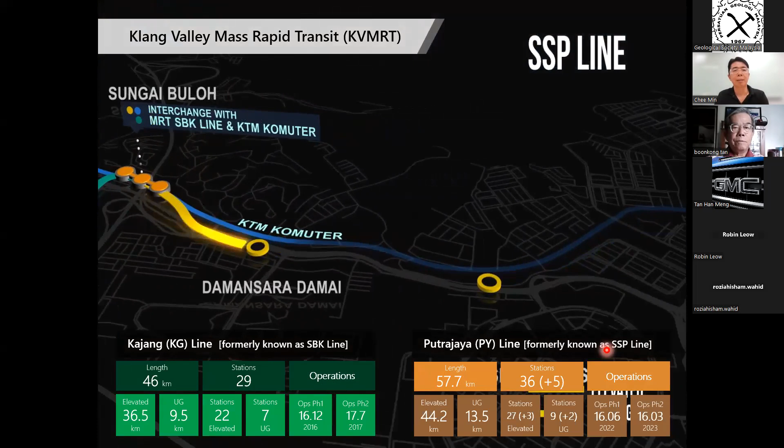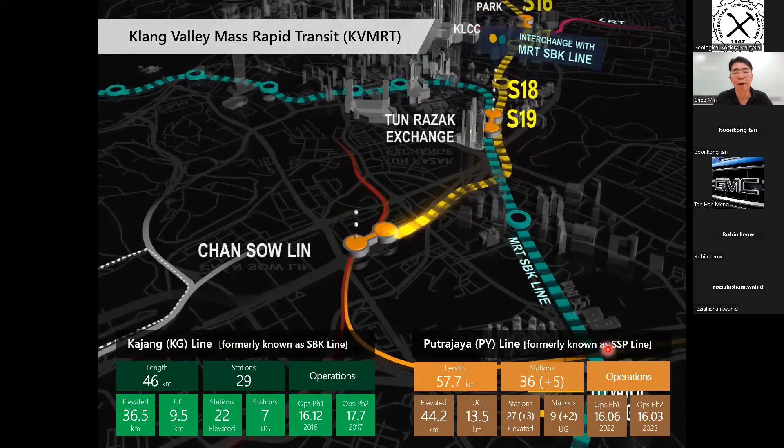I will discuss this topic based on two case histories in this Klang Valley Mass Rapid Transit project, one of the mega infrastructure projects in Malaysia completed recently. The Line 1 Kajang Line, formerly known as the Sungai Buloh Kajang Line, has a total length of 46 km, 29 stations, and started full line operations in July 2017, which was 6 years ago.

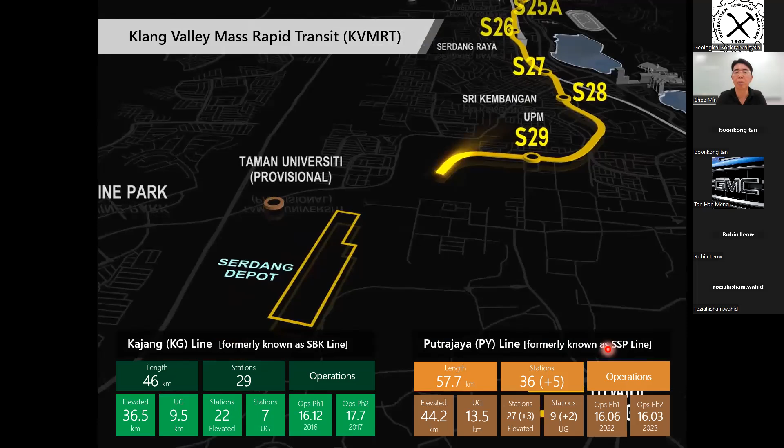And then the Line 2 Putrajaya Line, formerly known as the Sungai Buloh Serdang Putrajaya Line, with a total length of 57.7 kilometers, 36 stations inclusive of 5 provisional stations, of which 9 are underground stations. It opened in 2 phases - Phase 1 was on 16 June last year, and full line opening was just in March, about 7 to 8 months ago. I hope you enjoy this metro line.

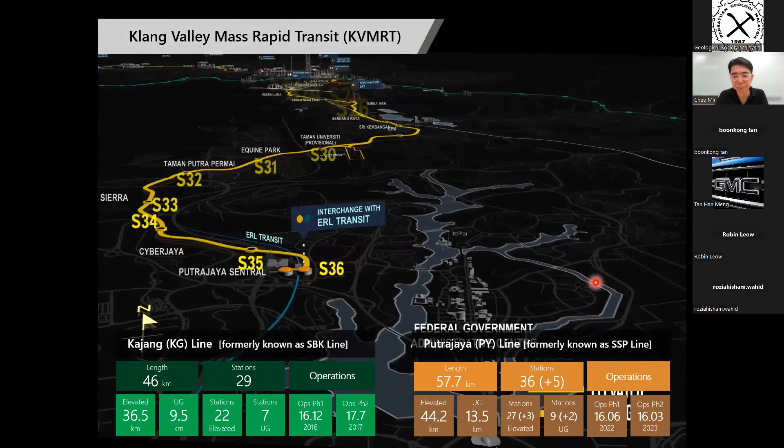Geologically, we can see that Line 1's alignment basically runs through 2 distinct geological units, which are Kenny Hill formations and KL limestone. The interface between these 2 formations is encountered after the Bukit Bintang station, somewhere near Pavilion KL.

And for Line 2, the Putrajaya Line, basically the line runs through all 4 major geological units in Kuala Lumpur, including the Hawthornden Schist. There is a stretch of elevated viaduct where the foundations encounter the Hawthornden Schist.

For the underground alignment, it starts at the depot with the KL limestone. Then the first underground station, Sentul Barat Station, is actually at the interface between granitic formations and limestone. Then the tunnel runs into granitic formations, and arriving at Titiwangsa is again at the interface between Kenny Hill and granitic formations. Then Hospital Kuala Lumpur is actually in the Kenny Hill formations.

We did encounter the quartz materials during tunnelings around these areas. Then we move into the KL limestone, arriving at the Kampong Baru, or currently known as the Raja Uda station, which is located at the alluvium overlying Kuala Lumpur limestone.

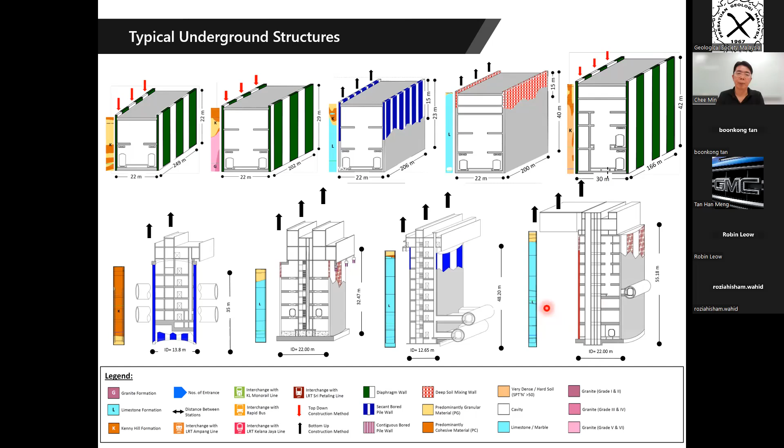In terms of excavation depth, the underground structures mainly are, I would say, 20 meters deep or deeper than that. For Kajang line, the deepest station is actually the TRX station located in limestone formations, 44.5 meters deep. So for others, 4 stations located in Kenny Hill formations where we adopt a diaphragm wall, the diaphragm wall thickness is up to 1.2 meters and quite reasonable tips up to 50 meters.

So when we built line 2, started in 2016, the stations actually go much deeper than line 1. One of the reasons is the complexity of the underground spatial developments in Kuala Lumpur. For example, some of the tunnels have to undercross existing underground infrastructure like smart tunnels. Even the line 2 tunnel has to undercross the existing line 1 tunnel, for instance near TRX, where these 2 lines actually interchange. Because of that, you can see the stations have to go deeper.

And for line 2, the deepest excavation is IVS 2, 57.5 meters deep. I believe this is the deepest excavation that we as engineers have faced so far in the KL region. So we can see that even the diaphragm walls go deeper and deeper.

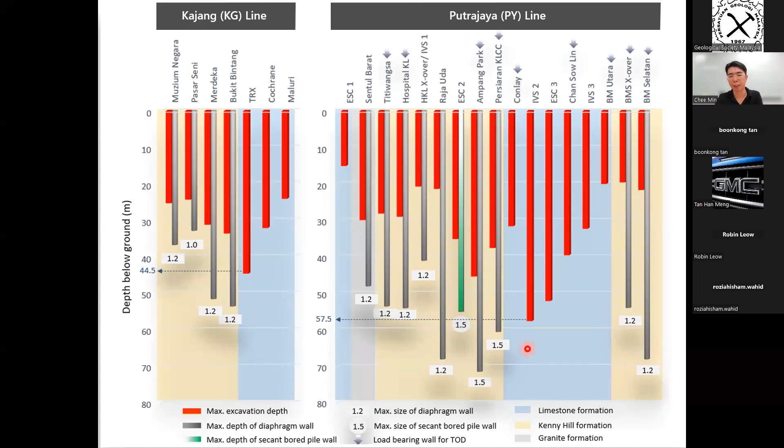And the size is even up to 1.5 meters thick for Ampang Park station. And even KLCC station is also 1.5 meters thick. So all these are the new challenges that the engineers and geologists have to face in these projects.

And now, these are the underground stations superimposed onto Kuala Lumpur maps. You can see they are mainly located in the congested urban built-up setting areas. Some other stations are actually located adjacent to tall tower, high-rise buildings, all these.

Some are even located near important building structures like the national museum. Merdeka station is actually located just right beside the national stadium, and of course, the currently tallest 118 Super Tall Tower. Same thing for Tun Razak, also located right next to the Super Tall Tower, 106 stories in height.

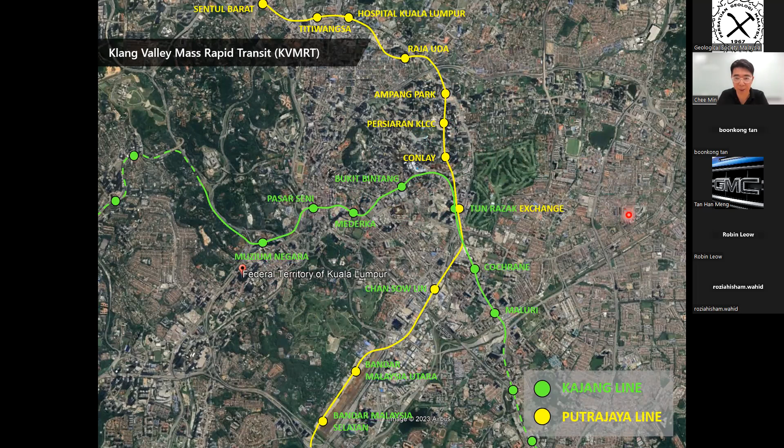Another case in point, even in Line 2, this is the Bandar Malaysia North station. As you are aware, it's located in the Sungai Besi airfield. I would say it's reasonably okay, but of course there are another set of challenges - Bandar Malaysia South is actually located right next to the heritage control tower. So it's also quite a difficult construction site.

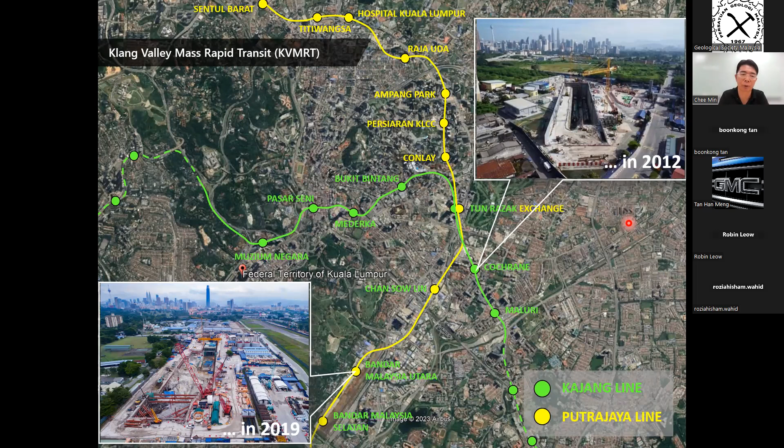So of course, when going into the KLCC area, the stations, like in this case the Bukit Bintang station, are located just underneath the major busy Jalan Bukit Bintang. You can see the station construction is carried out in 2 phases. One is next to the McDonald's, right beside the building, just about 4 or 5 meters away.

So they have to close the traffic and divert it to one side, start to install a diaphragm wall. Then once this is completed, they move to another site beside the Selangor buildings. Then start to do excavations and proceed downward with top-down construction. Of course, now you may not be aware, because the construction has been completed, we are just enjoying the underground station beneath this busy area.

Right, next example in Line 2, like these Conlay stations - the station is actually located just squeezed between existing towers, between the buildings. The area where we do this station is about 30 meters deep, located in limestone formation, where the excavation can proceed with open cut with ground anchors. But at certain locations you can see we cannot install ground anchors anymore because there's existing buildings, existing basements, so we have to opt for temporary strutting conditions.

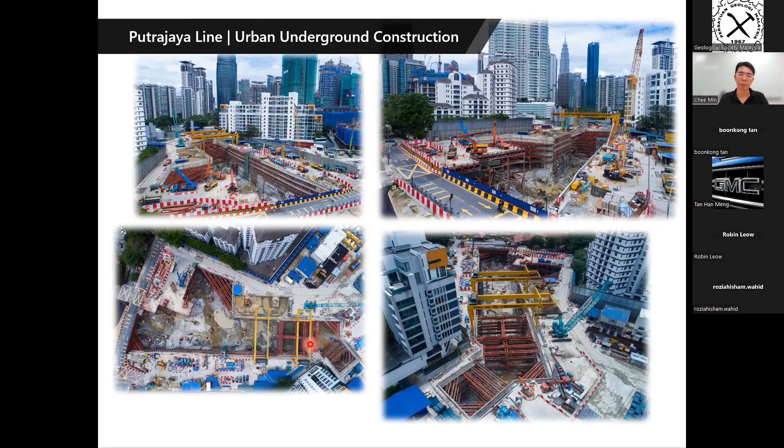So other than underground stations, we also need to build the tunnels. Just some information here - somebody asked about the tunneling. For Line 1 tunnels, 9.5 kilometer twin tunnels. Geologically, about 45% in limestone and 55% in Kenny Hill. It's quite distinct between these two.

When we come to Line 2, as I say, all the geology we have to face, not even just in underground station excavation, but in the tunneling as well - limestone 39%, Kenny Hill still majority at 44%, granite 14%. And another challenge is this mixed formation where the tunnel is actually driving through the alluviums, or maybe a mixed-face condition between soil and rocks, constituting about 3% of the total alignment.

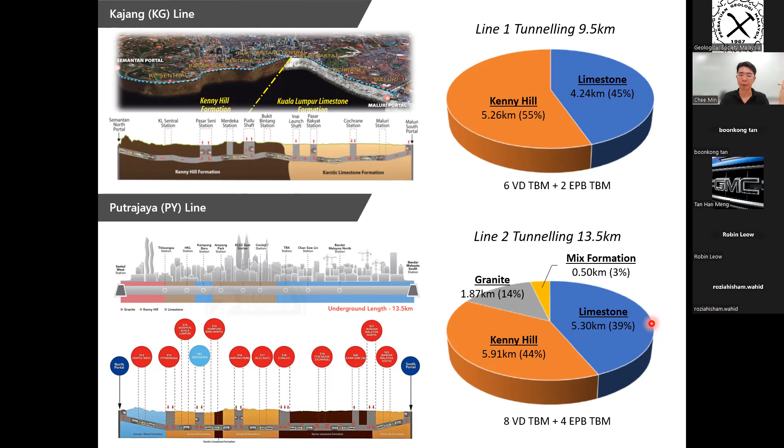These are just pictorial representations of the tunneling in the various geological conditions. You are well aware about the nature of each geological formation here.

All right, for today's presentation I will talk about 2 project sites in the Putrajaya line. Both project sites are located actually in limestone formation, KL limestone, but I would say extremes of both spectrums. The first project site is the Hospital KL crossover, 20 meter deep excavations, but the limestone formation varies - the limestone rock head actually varies from 18 meters below ground to as deep as 100 meters below ground. And we faced a lot of issues in this construction site.

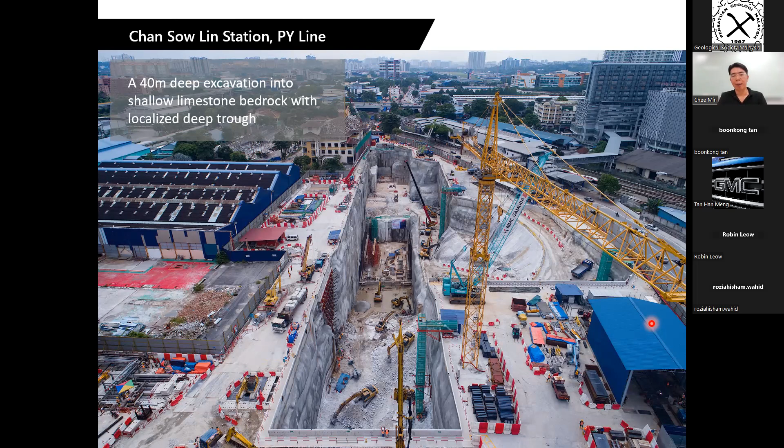So the second site is another extreme. Not only is the limestone deep, but in the KL region we sometimes face the limestone being very shallow. Just like in this case, the Chan Sow Lin station, the limestone rock head can be quite near to the surface - just about 4 or 5 meters of excavation you will encounter the limestone bedrock. But for this case, we encounter a very deep limestone trough running across the station. These stations are 40 meters or deeper. The limestone trough can be as deep as 30 plus meters.

But between these two, I will talk in more detail about the Hospital KL site and briefly walk through the second site for the shallow limestone, depending on time permitting. So I might run very fast for the second site.

So for this Hospital KL site, I will start with the unforeseen surprises - it was really a surprise to us as geotechnical engineers, and I believe for the geologists as well. Then I will talk about the geological and hydrogeological models, what are the associated geological risks, and how we actually prevented or mitigated those geological risks. Then I will follow with some performance of the construction with monitoring records, and I'll wrap it up with some lessons learned.

So let us start on the first construction site - Hospital KL crossover. I'll just name it as HKLX.

Location-wise, I believe you are familiar with the KL context. It's located next beside the IJN, Institute Jantung Negara, bounded by Jalan Raja Muda Abdul Aziz. To the south is actually Kampung Baru.

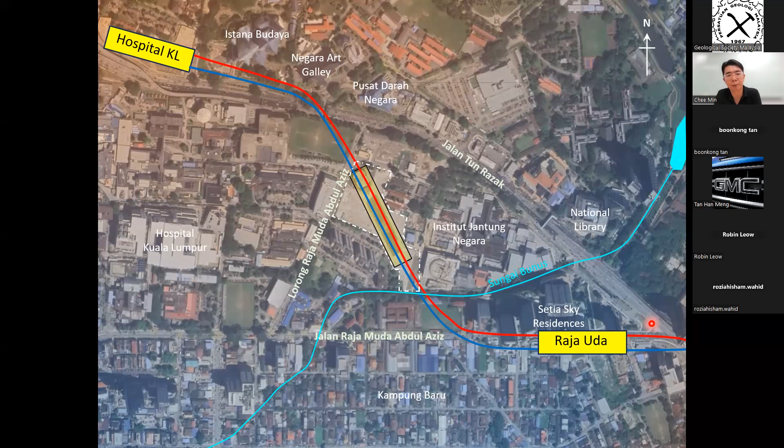Underground structure is located between the Hospital KL station and Raja Uda station. The other point to note is it's also quite near to the Sungai Bunus, which runs through at the boundary of the site. So for your information, why it's called crossover box and cripple siding track, you can look at the layout.

The two lines, the red line and the blue line, denote the two tunnels or alignments. Red is the southbound, blue is the northbound. At these underground facilities, the line or the train can cross from one line to another. You can see the red line, if needed, can cross over to the blue line, and the blue line can cross over to the red line.

To the side of it, you can see another two straight lines, which we call the cripple siding track, where for those cripple trains that have a problem, they can stable, or in layman terms, park in these cripple siding tracks while it will be pulled to the depot for further maintenance.

So these are basically the context of the HKLX. It's not a station, you can't access it here, but it's meant for the railway operations and maintenance requirements. So more important now, I would like to draw attention to the adjacent existing building structures.

First of all, for the purpose of this presentation, I will call the left side the western part or western section of the HKLX, and the right side the eastern part, instead of using true north, which would be quite confusing. Just for simplicity, I will follow western on your left, eastern on your right.

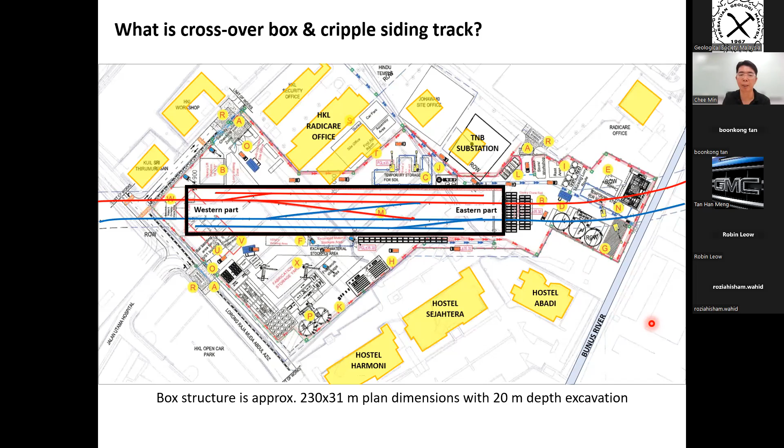So the box is about 31 meters wide, 230 meters long. The depth, as I mentioned, is 20 meters. So it's not a simple underground structure - just 20 meters deep compared to others which come up to 40 meters. This is relatively shallow, 20 meters deep, 30 meters wide.

The temporary earth retaining structure system adopted in the design are temporary struttings. There are 4 layers of temporary strutting across the diaphragm wall. The diaphragm wall is also 40 meters deep, so it's not very deep.

In this case, you can see the depth of excavation is 20 meters, then the wall embedment is another 20 meters - one time the excavation depth, 40 meters total - and the embedment is strengthened by this cross wall. Actually it's also one type of diaphragm wall, but it's built across in a transverse direction across the box structure at a 15 meter interval, so we call it a cross wall.

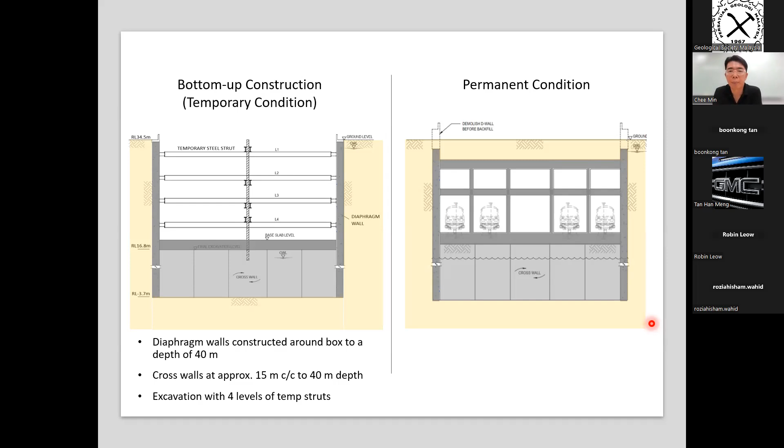Then to the right is the permanent conditions, permanent box conditions. Of course, as usual, we start with a desktop study. We look at the geology maps and see what these geological maps tell us.

Then in the version of 1993, also in the Kuala Lumpur limestone, but in this version of the map, the quartz dike is actually moving further north. And the 2011 version is quite similar to 1976, although the legend used is in a brick format, but it's also confirmed in KL limestone formations. So it's no doubt that all these versions of geological maps suggest that the site is underlain by the Kuala Lumpur limestone formations.

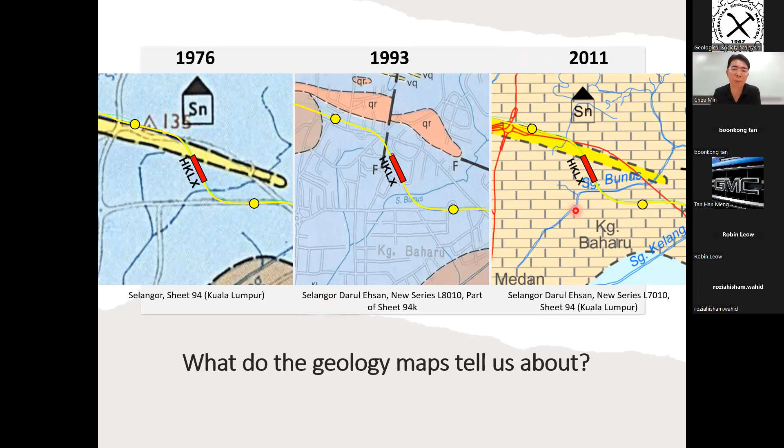So there is a reason why we traced back to all this site history information. I will deal with it in more detail later. As I mentioned, construction started in 2016, and in 2015 we were actually in the reference design stage.

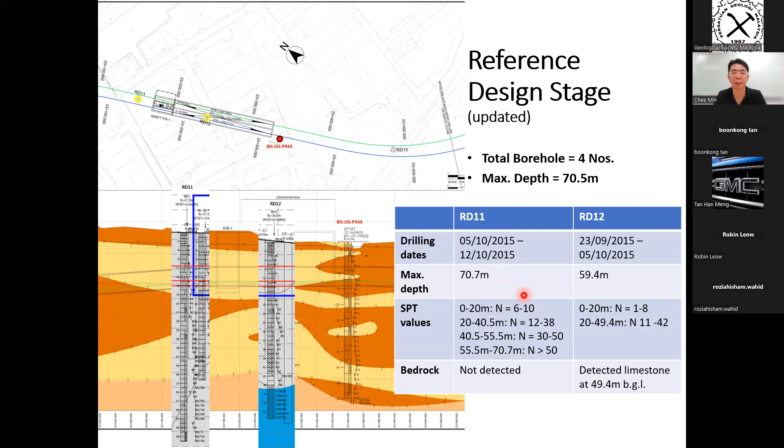You can see the profiling here: 0 to 20 meters, SPT about 6 to 10; 20 to 40 meters, increasing with depth from 12 to 38; 40 to 55 meters reaching 50; and 55 to 70 meters, another 15 meters thick, is actually hard material with an SPT value more than 50.

And then unforeseen surprises occurred. The first incident was a large ground depression. It occurred when the contractor was doing a borehole—a new borehole, other than the 4 numbers already done, carried out by the bidder during the tender stage.

This is a very deep borehole, if not mistaken, down to 100 meters deep. But when the borehole was completed, as the contractor was withdrawing or extracting the drill rods, it caused a ground depression at the car park area.

It's very strange—how can a borehole of just 4 inches in a KL limestone area cause such a ground depression? It's not a sinkhole by itself, I would say, but just a depression.

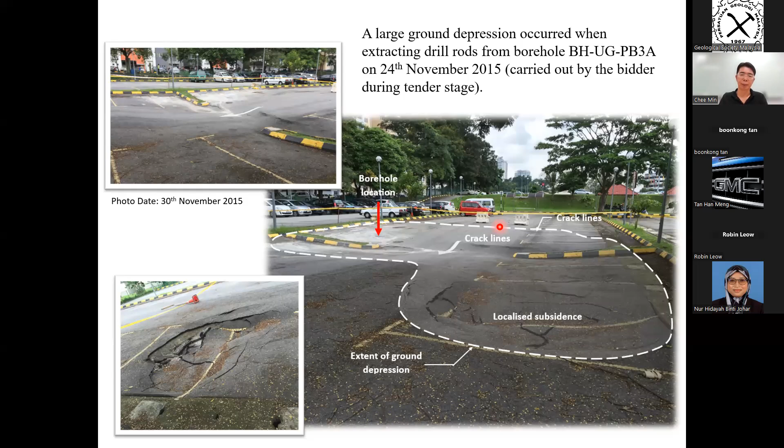Going forward, the contract was awarded in the first half of 2016. Then the successful contractor proceeded to carry out their own further investigations. The blue-colored boreholes are those completed pre-award, either by the employer side under reference design, or by the bidder during the tender stage. Post-award, the contractor carried out additional boreholes along the station perimeters, typically about 50 meters apart according to contract requirements.

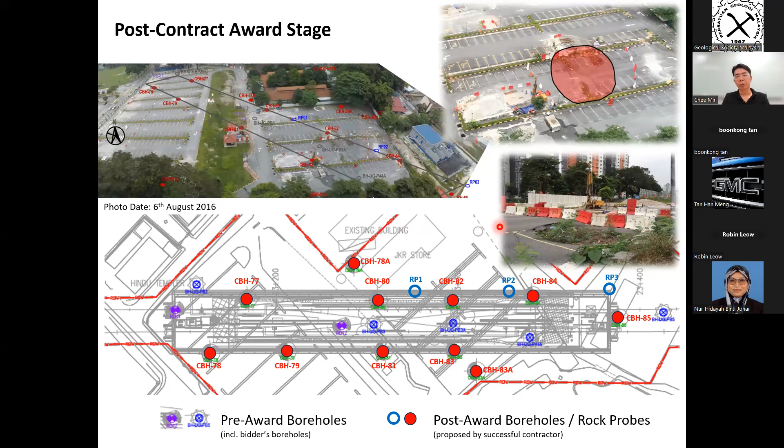Let us see what happened next. Awarded in March 2016, the contractor then carried out their boreholes and detailed design in the second half of 2016. When the contractor went to the ground to carry out grouting, it was made aware that this site is quite problematic, so in the contractor's design they required ground treatment using compaction grouting.

When they started in early 2017, a second incident occurred. You can see in the layout here that the site is actually the epicenter of the ground depressions. At that point in time, let us see what activities were on site. Please remember this red borehole is where the first incident occurred, named simply PB3A. This is the location where the first borehole drilled caused depressions around these covered regions.

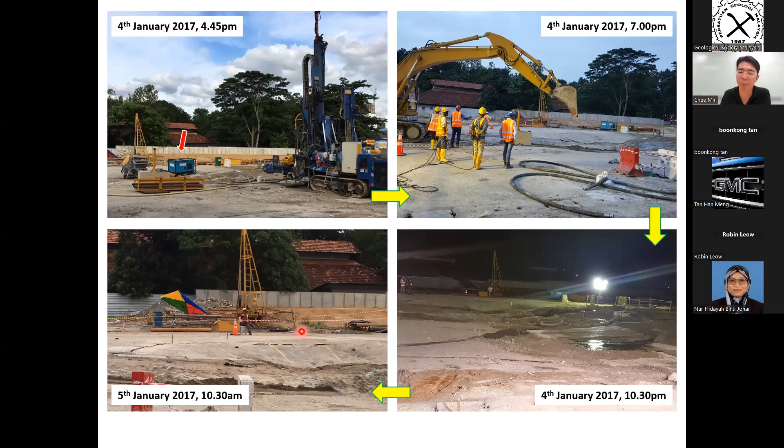Here's another photo showing the afternoon of the second day. You can see it's actually a cone shaped kind of ground depression with cracking. On the second day, the contractor installed ground settlement markers to measure the development of these ground depressions and ensure the ground has been stabilized before we move on with the next course of action.

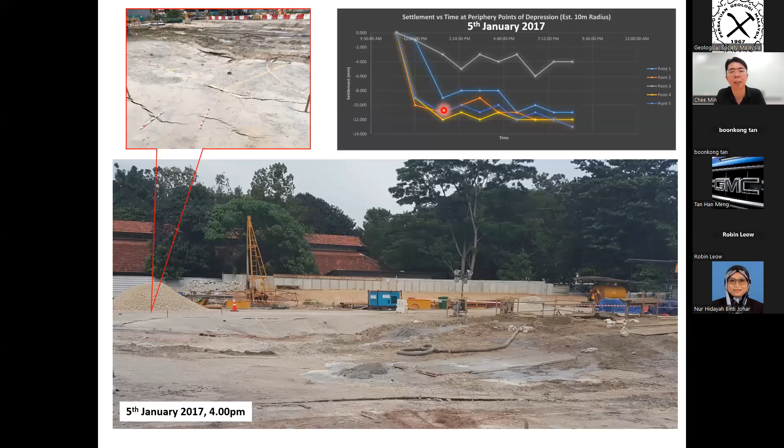These are from the 5th of January. In the morning it settled quite substantially, and we can see in the afternoon it starts to stabilize.

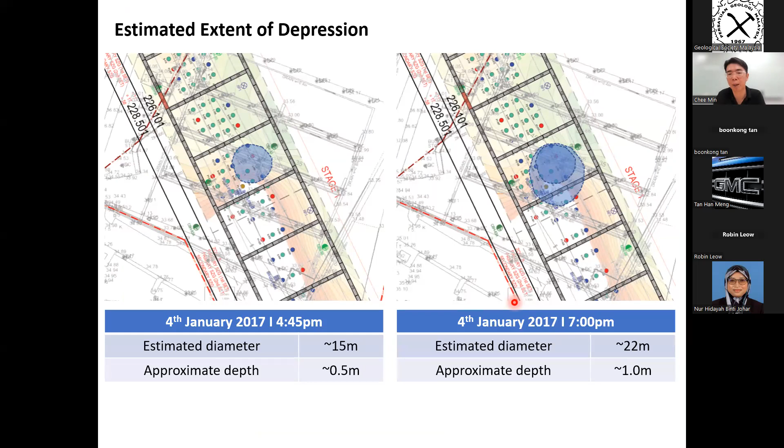So this is just a representation of the extent of the depressions. The first record estimated a diameter of 15 meters wide, depth 0.5 meters. Then it developed further to 22 meters wide, and the depth increased to about 1 meter deep.

And the ground is propagating outwards, right? At night on the incident day it extended up to 25 meter diameter wide and about 1.5 meters deep. On the second day, the ground is still propagating, but at a slower pace.

As estimated, the volume of ground loss or ground depression is about 300 meter cube. So we can see that this kind of incident is not like a usual sinkhole that very suddenly creates a hole, but rather the ground progressively depressed downwards, forming a cone shape. It's very surprising, unforeseen and unusual, I believe, for most of us.

Because of all these issues, the employer decided to commission an independent expert review, trying to understand what actually happened here. It's just a limestone formation, similar to what we've seen before, but this is an exceptional case. Because of that, there were more thorough investigations, including a desktop study tracing back to historical maps.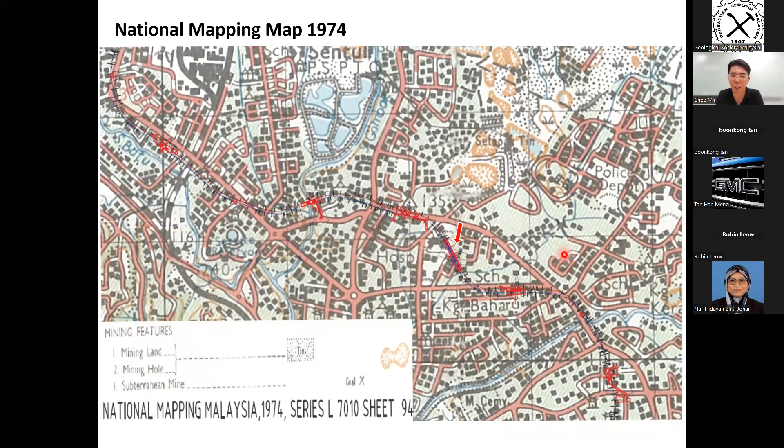This map is a 1974 so-called geotechnical map made available to us for study. The dots represent mining activities. It comes close to the site but not exactly at the site. This geological map also shows the quartz dikes to the north.

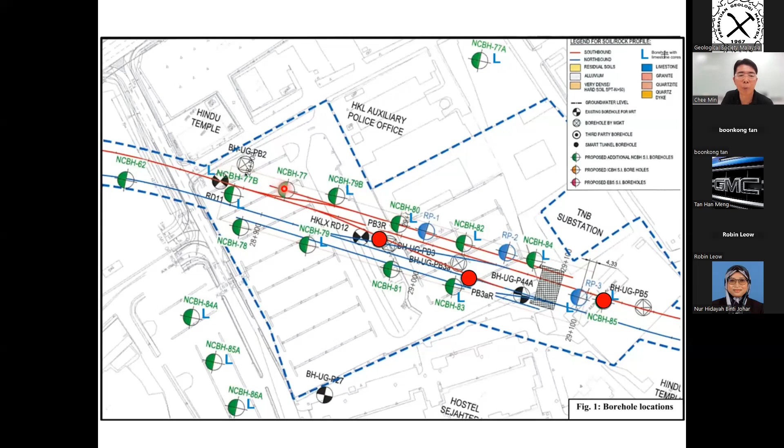The first incident occurs with this borehole, PB3AR. Then during this borehole PB3, also limestone encountered, and to the east in this case another borehole encountered limestone and NCBH 85. So boreholes labeled with L's actually encountered the limestone rockhead. Some boreholes terminated without encountering any limestone.

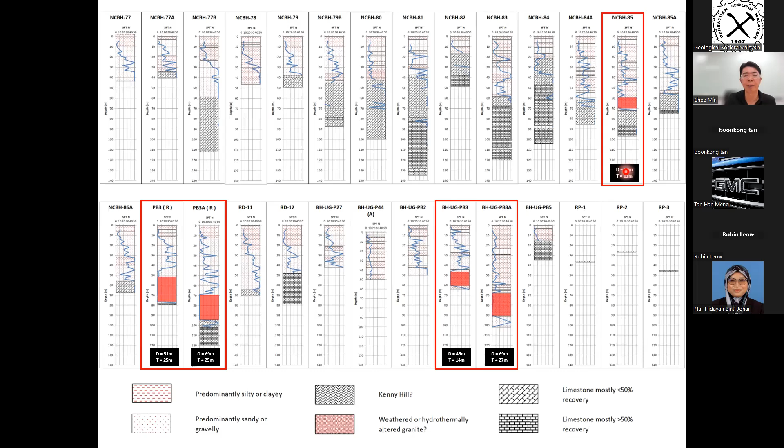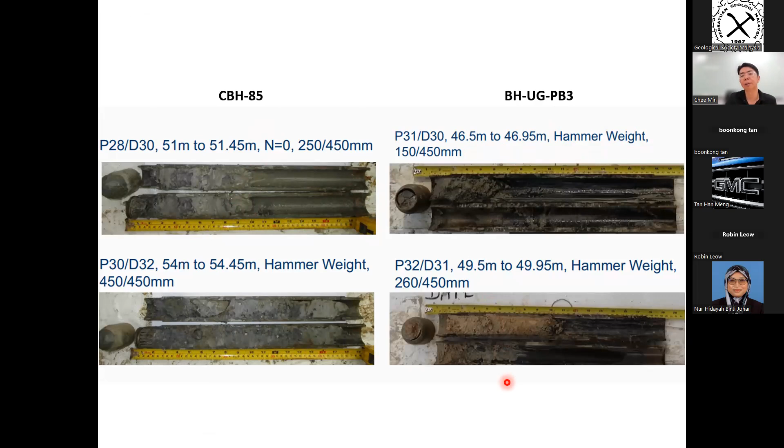This photograph shows the material sample from the slime zone. This is CBH 85 to the east side, and you can see quite sandy, gray material. This is in the middle, BH-UG-PB3, at a depth of 46.5 meters, hammer weight another sample in brownish color, also hammer weight.

When you look at the SPT value, we can see the SPT increases with depth up to about 50 meters below ground, and below that, SPT zeros are encountered down to about 80 meters. The blue data points are pre-award boreholes and red are post-award. For these slime materials, they are red, encountered in boreholes like PB3R, 3AR also. This gives you a sense that they are very thick and very deep below the ground.

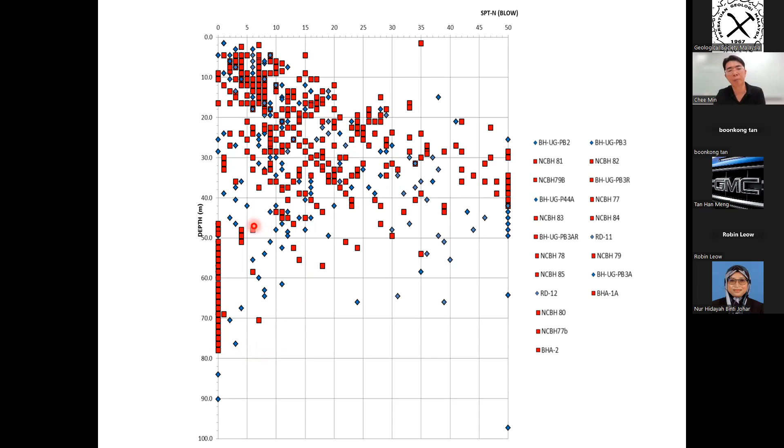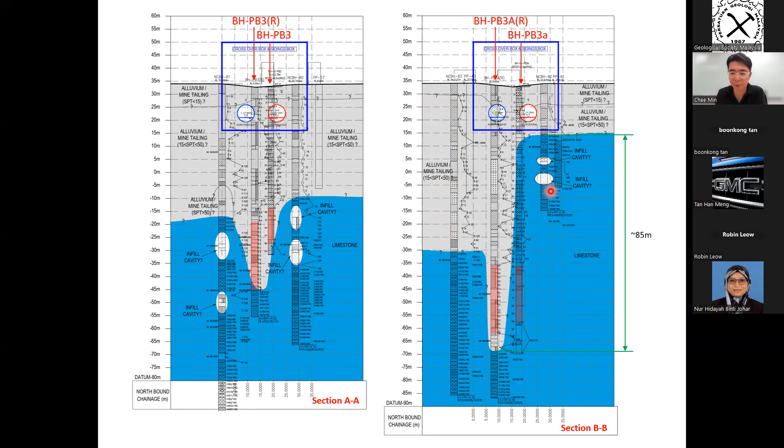We also scrutinized the borehole logs and found that the cavity infill and the groundwater is maintained overnight, suggesting the cavity is somehow disconnected. So it's actually not a solution channel or an empty cavity, where normally if you encounter that you would have water loss quickly.

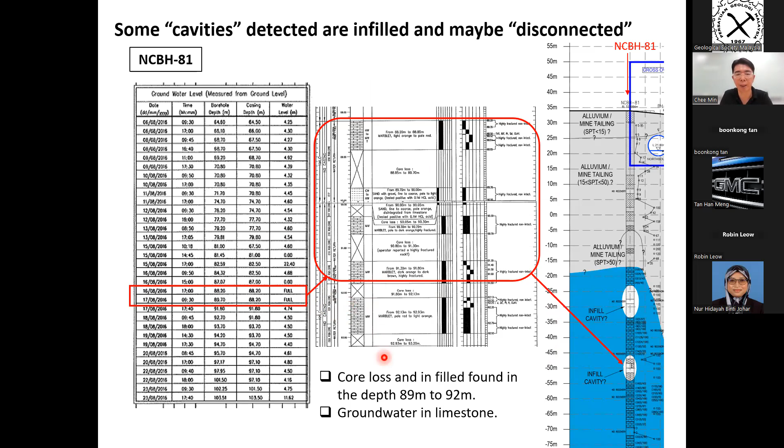For these so-called cavity areas, SPT was carried out and it revealed the N value is actually quite high, some more than 50. This is another borehole, NCBH, previously 80, now NCBH 81. Same thing - the groundwater is full overnight in field, and this is relatively deep, 89 to 92 meters, with a high SPT value. So what does this tell us?

Is our interpretation correct, or is there something else? We know the karstic features are up to interpretation, so you have to look at it three-dimensionally - not only in terms of depth where we say it's a trough, but it can extend laterally and diagonally to other areas. For this case, because of the points I highlighted - infill cavity, high SPT, and it's disconnected - we don't believe it is a floater or remnant of limestone material.

You can see it's relatively thick, about 5-6 meters for this case. We rule out this situation and believe the most likely situation is a trough, sandwiched in between by these limestone formations. Previously it could have been full limestone, but weathering and slumping into cavities created a trough. These two areas might one day become the same thing - this is an interesting part.

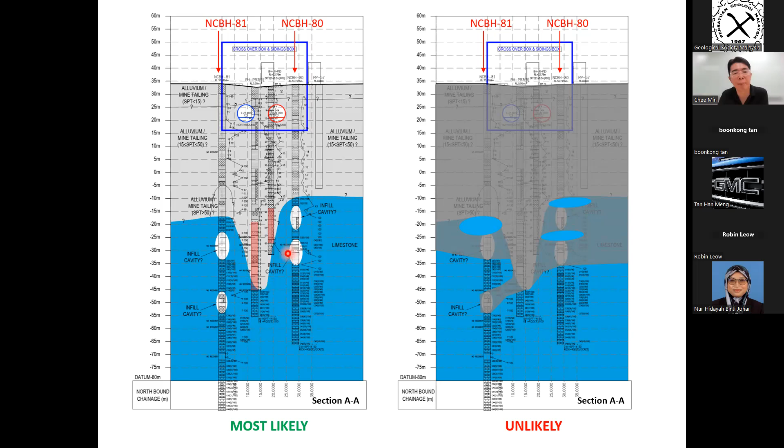We talk about the water loss in the borehole. For those two boreholes, although there was no water loss, we did encounter water loss in other boreholes, highlighted here with yellow dots, mostly located around this southbound alignment. You can see the limestone is also higher and more cavities are encountered in the southbound alignment.

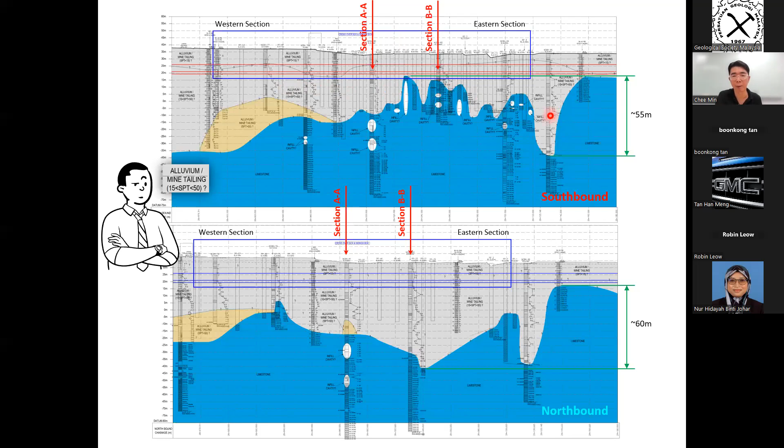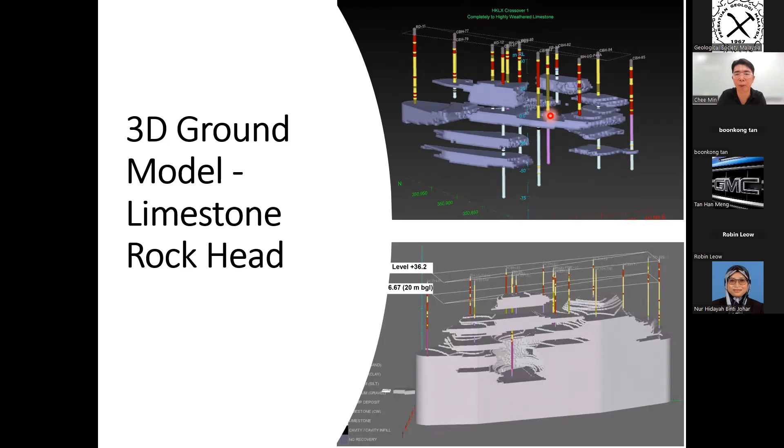Now this is another model for the limestone encounters, but I would say this is different from our interpretation because of the limitation of the models. That's why you have to be careful - you have to know what you're dealing with. This just shows the limestone in layers, but what we interpreted is actually a solid limestone with a deep trough.

Now, what is known for the ground conditions: the site is underlain at depth by limestone, and the rock varies from 18 meters to as deep as more than 100 meters. There are some cavities in the limestone, and the overburden materials consist of sand, silt, clay, gravel - all the materials you can name, we have here.

SPT values are more than 50 blow count. The slump zone is quite deep, 45 meters - which is actually lucky, since that sand is actually below the toe of the diaphragm wall. Remember I mentioned the 40-meter deep diaphragm wall - so it's also intended to try to avoid disturbing all these slime materials.

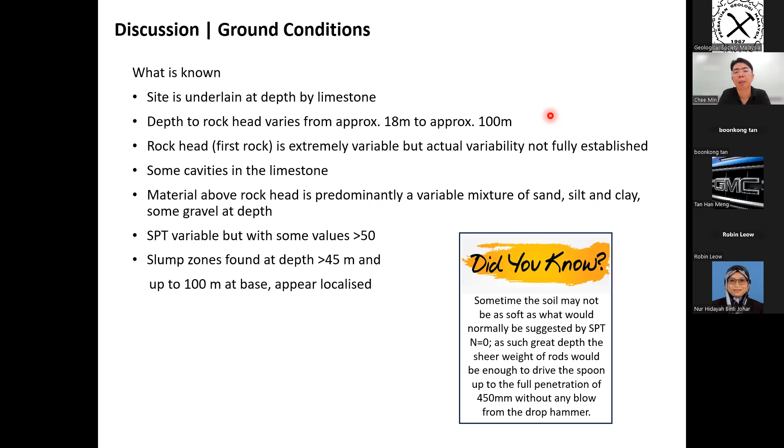As I mentioned, there were discussions on whether the overlying materials actually belong to Kenny Hill formations, alluvium deposits, or even mine tailings. This is an interesting part where we have very thorough technical discussions and debates among the experts. We have Expert A, Expert B, who are the project design consultants, and Expert C, who is the independent consultant commissioned by the employer. First of all, both consultants do not think the material is Kenny Hill formation, and this is agreed by Expert C. So they have their points listed here.

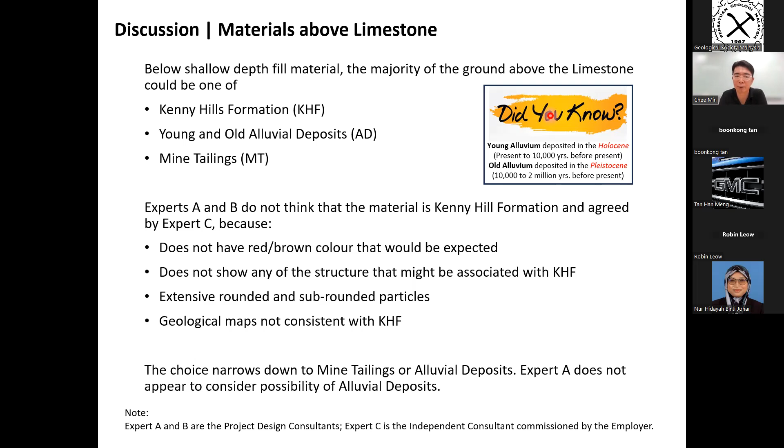But Expert A does not seem to consider the possibility of the alluvium deposit as the overlying material. Expert A thinks it is mine tailing. Let's see the points put out by Expert A in his view.

Number one, low SPT value. Expert A claimed the materials were possibly pumped or backfilled without any compaction and further disturbed by slumping into the underlying limestone, because the white color also suggests the iron oxide may have been removed during mining operations.

The third point: the materials vary widely in grain size, are poorly sorted, and display no bedding, laminations, or graded beddings. Expert A's point of view is that this suggests an artificial environment like a retention pond, similar to mining conditions.

The fourth point: borehole logs register the material as completely weathered Kenny Hill formation from quartzite. You can see the photo in the upper right, showing some muscovite content and even some iron oxide, probably weathered from the sulfides.

These are some of the case examples put out by Expert A, because woody materials were encountered in one of the boreholes.

Now let's look at Expert B's point of view. This expert tries to put it into equations for the engineer's understanding. First, let's look at the abbreviations used - I'll go a bit slowly.

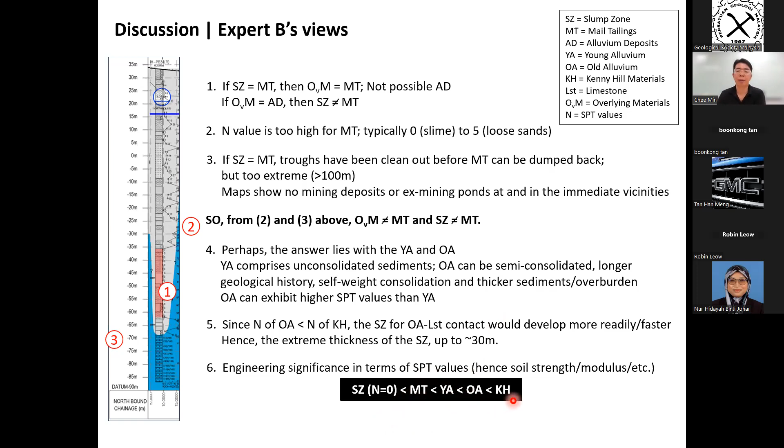So expert C is saying that most likely this is the old alluvium, based on the desk study, based on the sample inspected, based on the depth. We are talking about 100-meter deeps, and based on the variability of the rock heads and the narrow trough that we can see here.

The other interesting point he argued is that if this is a mine tailing site, in such a very narrow situation, you would need to go down 30 to 50 meters deep below the slime materials. That could mean you have to dewater for more than 50 meters deep, but this is in the center of the KL urban area. Although we are talking about 50 to 60 years ago, it's quite ridiculous in a way.

Expert C also interestingly talks about the high SPT value, which might not be expected unless there was some compaction. Not only high SPT value, but also not merely low SPT value in the overburden, the first 50 meters of overburden, so it's unusual for mine tailing. Of course, wood fragments can also be found in alluvium depositions.

So it's quite interesting. Moving forward, as engineers, technically what is more important to us is actually the performance, the engineering performance or the soil parameters of the materials. That is more key and important for us to carry on with the geotechnical design.

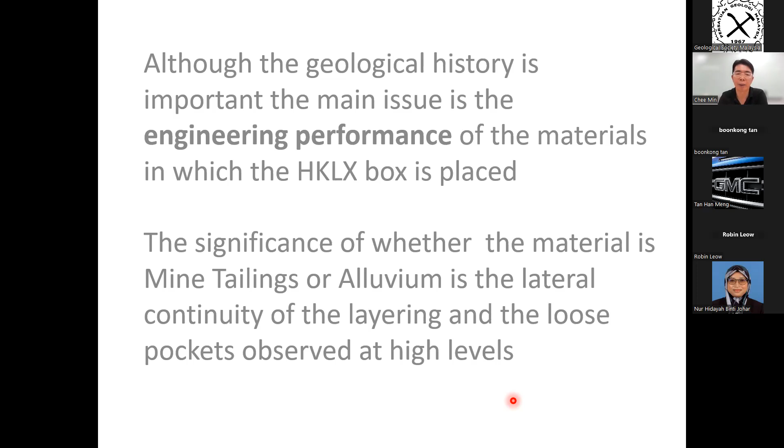So the significance of whether the material is mine tailing or alluvium is less important than the lateral continuity of the layering and the loose pockets observed at the high layer, whether it extends to a far area to the adjacent structures where it could bring construction impact - that is more important to us. So when we look at this, it's not one-dimensional or two-dimensional, but three-dimensional.

Sinkhole mitigation measures: we learn from the literature that almost all sinkholes are triggered during construction activities. Main triggering factors can be lowering groundwater tables, loss of fines washed out by groundwater into the voids, imposing additional loads, or vibration due to piling, punching of cavity either by borehole or pile. These are some of the factors.

So bearing this in mind, the prevention strategy adopted in the design is first to ensure construction load or permanent load is less than in-situ. So now you can see why, for just a 20-meter deep excavation, we adopted a 40-meter deep diaphragm wall - one-to-one excavation is not deeper than that - with the intention of trying to avoid and not increase any load to the deeper slime materials.

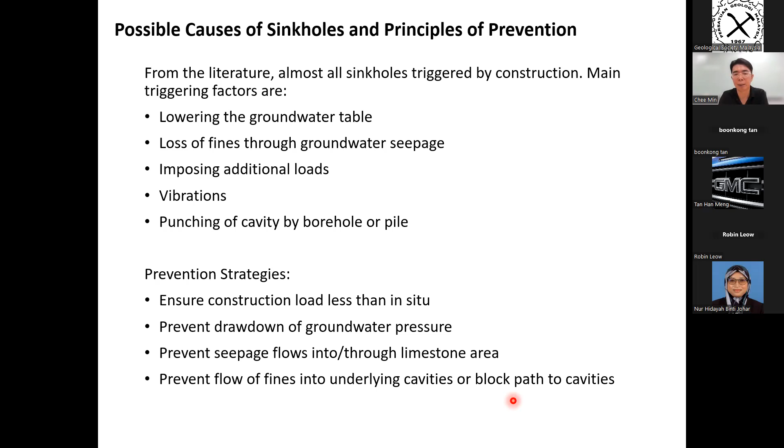Then preventing drawdown of groundwater pressure is important, preventing seepage flow into the limestone area, and of course preventing the flow of fines into the underlying cavity is also important. So this, as I mentioned just now, is the design principle for the permanent structures.

And the third point is that the base slab was designed as a deep raft foundation - it's not only relying on the diaphragm wall, but the base itself. The fourth point is the compensation foundation without increasing any effective soil stress at depth. Then the uplift is resisted by the diaphragm wall.

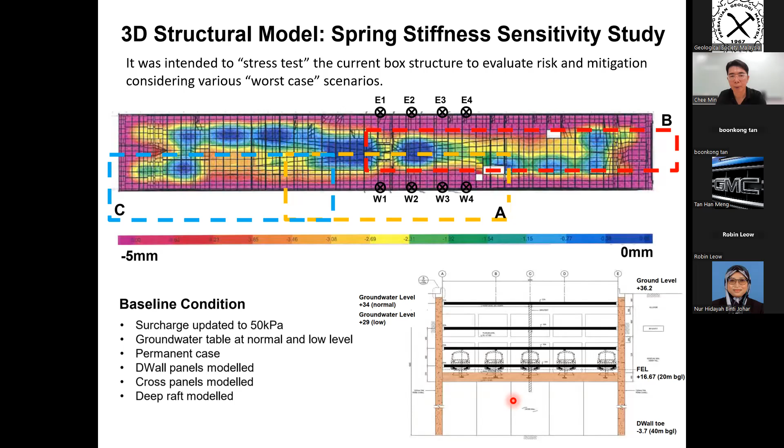So not only a normal design - because of these complexities, the engineer actually carried out additional analysis to stress test the permanent box structures, considering the slump material that we encountered at 3 locations. So there are 3 areas: zone A, B, C.

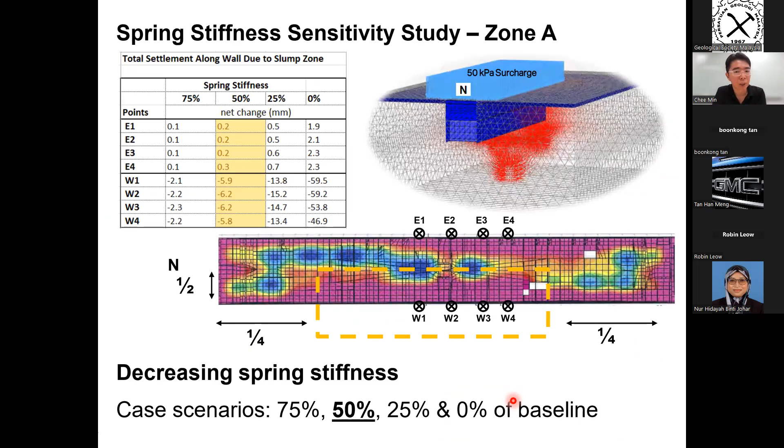Quickly run through - basically just variations in terms of the spring stiffness. We step down the spring stiffness from 100% to 75, 50, 25%, 0% from the baseline to see how tolerable this permanent structure design is. For this case, to the northbound, to the south, you can see that the limestone is much deeper, so the spring actually we have decreased to 0%.

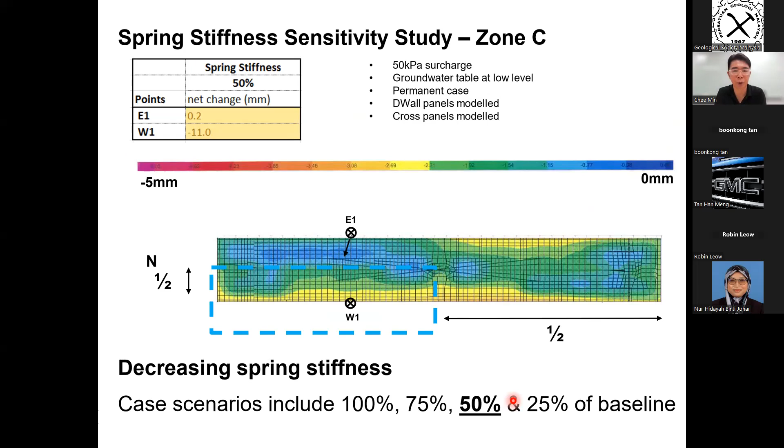Then for zone B, the limestone materials to the NCBH 85 to the eastern - again the same thing, different in the spring stiffness. Zone C is at another corner. So with all these 3 zones, it represents the entire box structure design. What we can conclude from the analysis is that the design is pretty much intact, even with the spring reduced to 50 or 75%, the settlement is still tolerable.

So then how about the residual risk? Because all this is cost, we have to balance between the cost and the risk for these areas, and we decided to adopt compaction grouting as a solution to it.

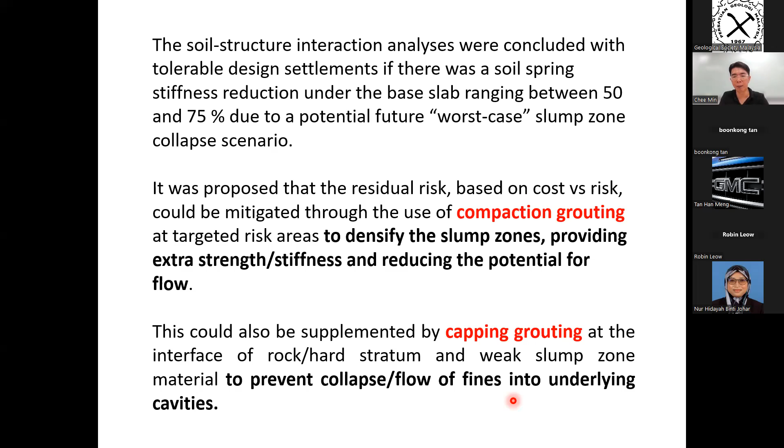There are 2 methods. One is compaction grouting - basically to identify the slump zone. It's basically grouted columns in the zone, providing extra strength, stiffness, and reducing the potential for flow. The other is capping grouting around the interface between the weak slump materials and the rockhead. So this is the figure showing compaction grouting and the cap grouting to the right. These are the typical termination criteria.

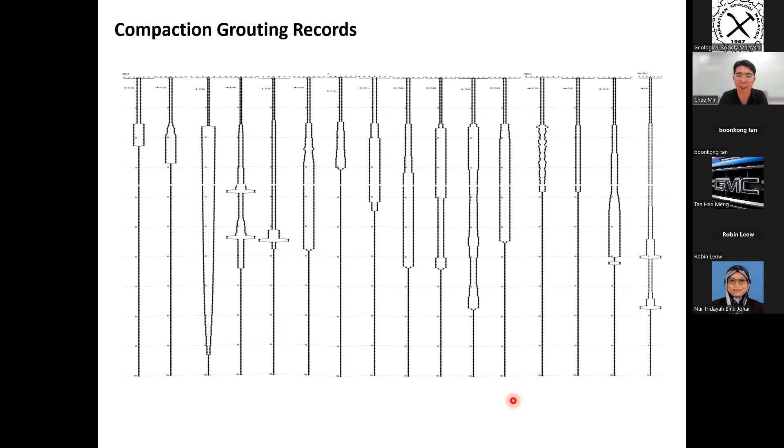So this is the typical compaction grouting record. You can see where the value increases, blowouts is where actually the weaker or softer materials was encountered. And you may ask, how about the ground depression incidence areas? It shows at these trough areas, generally higher volume intake and higher pressures is exerted through all these compaction groutings.

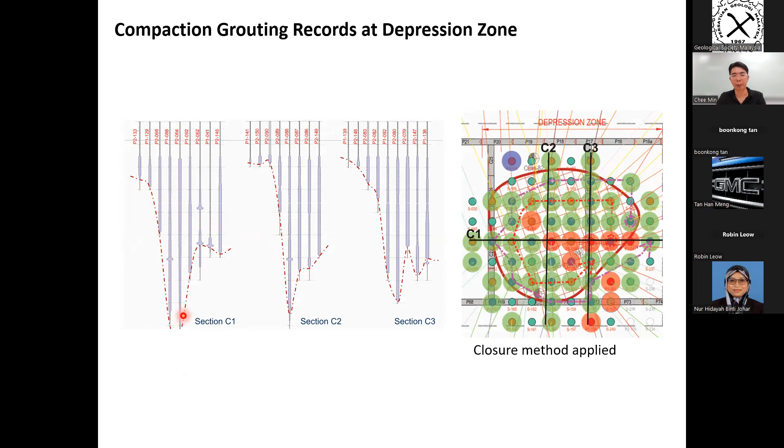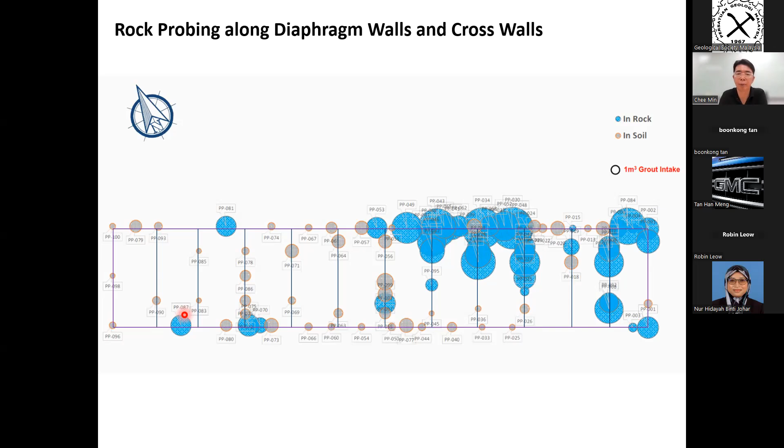And in this, all the total boreholes, drill holes, running rock probing holes for this project site. You can see the ground holes sum up to about 150 meter point with the total grout intakes more than 2,000 meter cube being consumed by these underground areas.

Just a point to note here, although this contouring is generated by Surfer, of course we do not recommend generating contours for the limestone bedrock this way. You have to be more careful because the limestone is erratic, up and down. It's not like granitic or other bedrock formations, so you have to be careful when you generate it using Surfer for limestone.

Excuse me, Engineer Khoo, sorry to interrupt. I think we kind of overshot the 1 hour. I know, running a bit faster, sorry. So I think we have to wrap up pretty soon, leaving some time for questions.

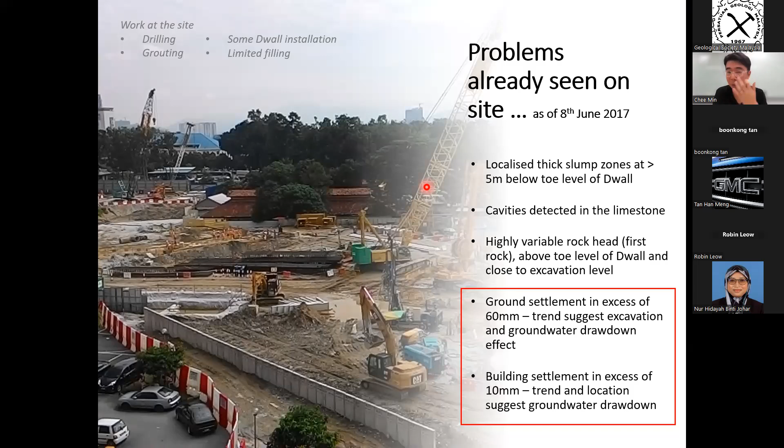Okay, sure, yeah. So for that study, it took about 2-3 months. Then actually the real problem still happened on site after the grouting point.

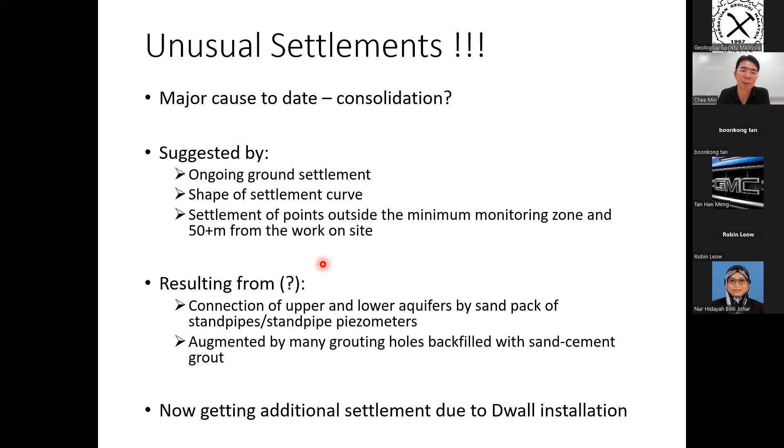We can see this hotel situated about 50 meters away, and one ground settlement point - the ground actually settled up to 60mm without any major excavation, just doing the borehole grouting point, but the ground is settling. Even the building also settled more than 10mm at that point in time. This is a very unusual kind of settlement, suggesting it could be due to consolidation, the groundwater issues.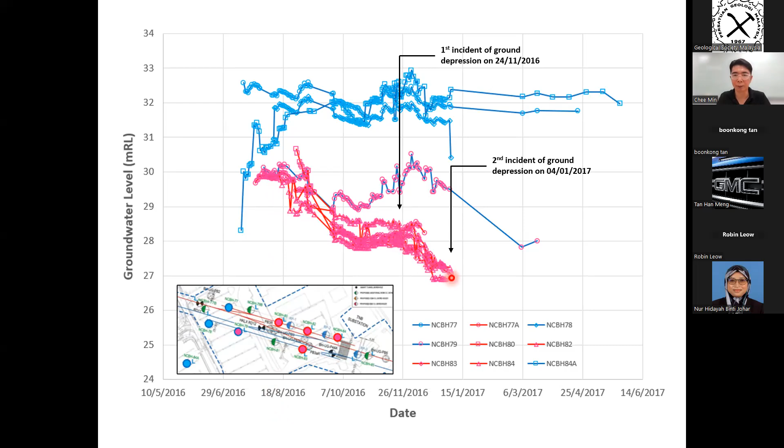You can see the timeline is sometime in June, August, but the water keeps dropping until the first incident occurred in November. Then since then, it drops by another few meters, then comes to the second incident. So this is a review of the standpipe.

You can see one of the issues we identified is probably because of this standpipe detailing, where normally just a 1 meter pipe on top, and then below that is a very thick sand packing area. So this actually encourages the flow of the water.

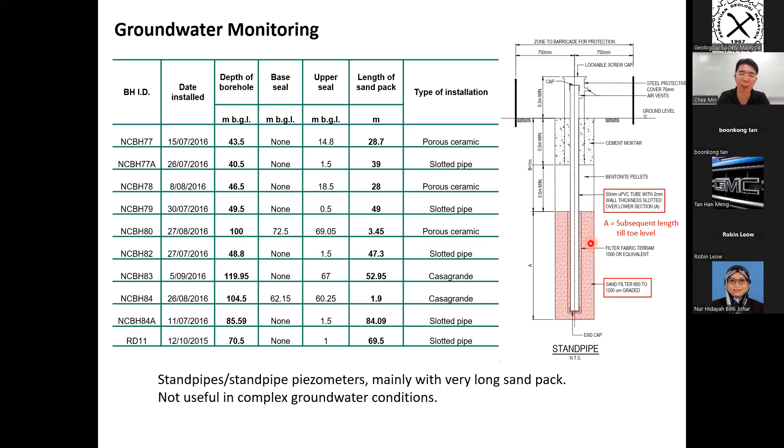What's more important is actually we encountered a perched water table in this area. With the upper layer, the water pressure is actually in a hydrostatic form up to 32 meter reduced level. But for the lower level, it gets back to about 27 meter reduced level. So actually there's a kind of aquifer at the deeper depths.

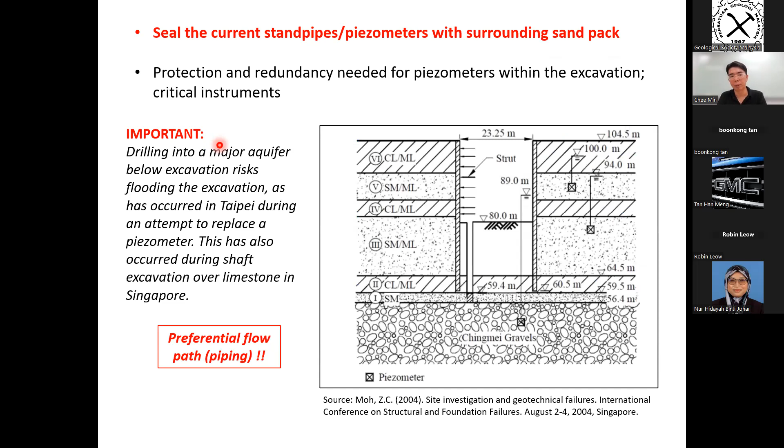And because of the sand packing in the long standpipes, actually the upper water regime is flowing down to the lower, possibly causing the ground settlements. So with that, we identified that water could be the most significant risk.

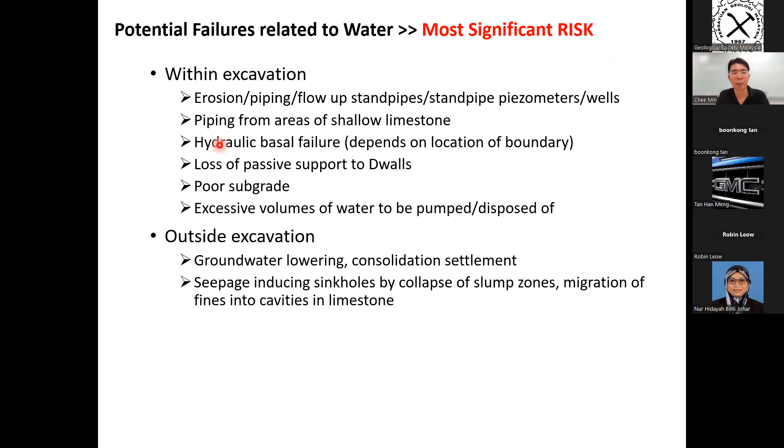And this is also a typical problem when dealing with excavations. So these are just some sketches showing that possibly the water will flow through the limestone, the porous limestone with a higher mass permeability, and cause base heave or maybe a sinkhole problem outside the box.

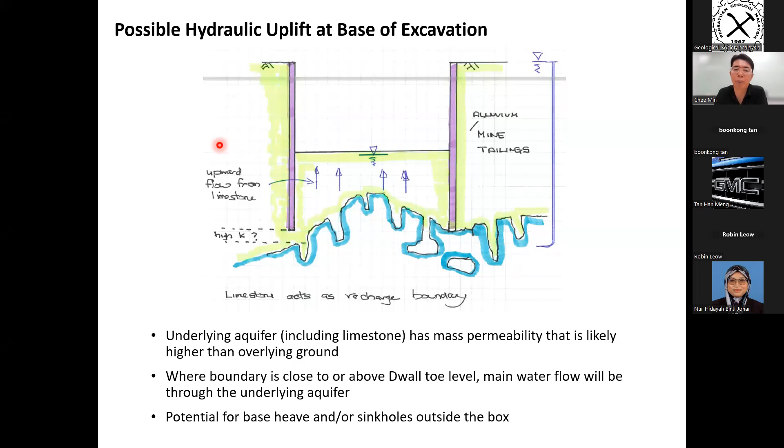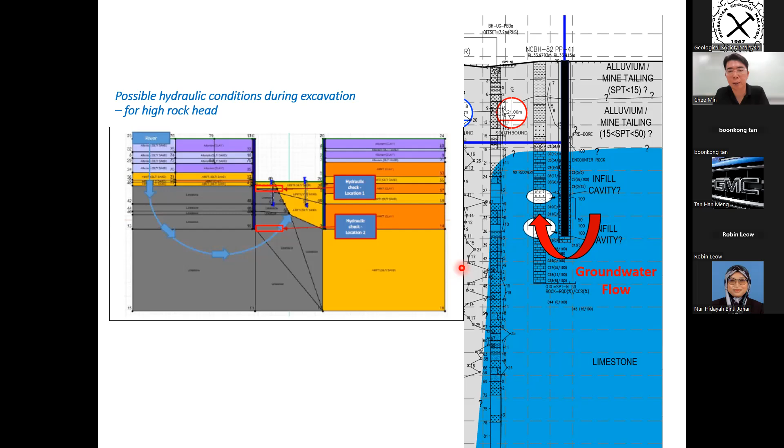So for engineering, we only need to analyze the seepage for normal cases within the diaphragm wall within soil, but we need to also analyze the diaphragm wall located into limestone in light of this possibility of problems encountered. Skip this - then this is the seepage analysis for the diaphragm wall in the limestone.

And what would you predict in this case? Moving forward, another 6 months down the road, end of 2017, the ground is still settling, although the rate of increment is slowing down. So at that point in time, activities - the diaphragm wall started in March, then the excavation started in June.

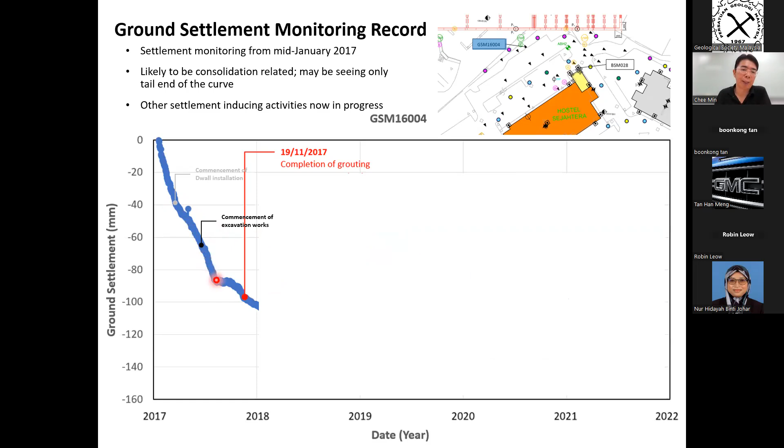By that time, the grouting work had been completed. And for the building settlement, it behaved the same as the ground settlement at about 50 meters away. So bear in mind that this 20-story tower building is actually supported on piles, but the pile foundation is still settling like the ground, similar kind of situation.

Settlement mitigation measure - of course, we lengthened the diaphragm wall.

Sorry, Engineer Khoo, I think we have to stop. Sorry, right, no problem, I have to stop because we have to leave some time for questions. Okay, yeah, okay, so I'll open the floor for questions.

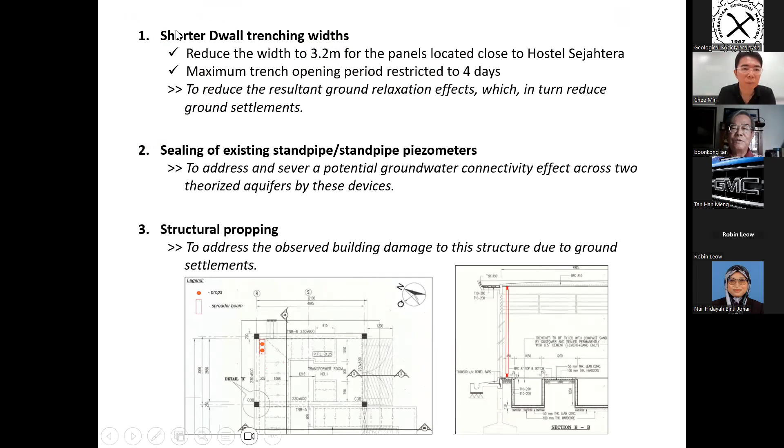Okay Robin, continue. I saw these questions on the chat box. Can you read it, Engineer Khoo? The question is from Hafizi: is there any geophysical survey done at the site?

So the short answer is apparently no, no geophysical survey was undertaken. Okay, answer is no.

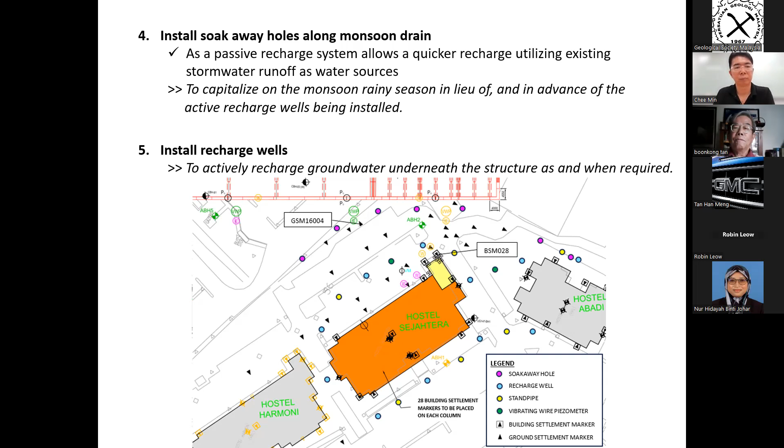But then expert B and C say the SPT value is high, so it's not possible to have this mining tailing, because mining tailing is slime, so we'd expect N equals 0. So in the end, you conclude it's due to fluctuation of the groundwater in the alluvium. So is that the problem - the fluctuation of this groundwater, and also incomplete settlement of the sediment?

So the sediment is still compacting - is that the reason? Because incomplete compaction of the sediment over the limestone caused the subsidence? It seems to be, it seems to be.

Well, thank you Mr. Robin for the questions. I think it's interesting to look at this. Right, can you hear me? Can you see the slide? So we can see they're almost a similar kind of pattern of the ground depressions - it's actually extending outwards from the epicenters.

In this case, when the grouting holes are carried out, even at the first incidence, the epicenter is at a distance away, then it extends outwards radially in a circular shape. Then it starts to sink progressively with time, taking time. So we know that the slime zone is at depths of about, let's say, 80 to 90 meters below ground.

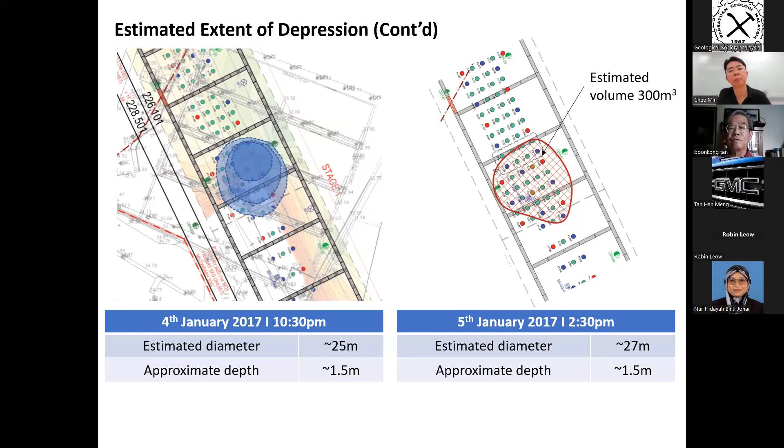Yes, this is good practice. In our MRT projects, we have this requirement to carry out historical land use survey, which includes engineering and geology study of the area, historical photographs of what the lands were used for before. In this case, other than the mine filling issue, we also know that there were certain periods when buildings were located on the ground there. With the building, there's a possibility of leftover foundations, which may cause problems during excavation - perhaps some RC piles encountered during box excavations. I think it's a good practice, part of the desk study before actual construction, to check the history.

Okay, I see a familiar name in the audience. Ilani, are you still there? No response. Ilani, are you there still? Okay, I think some of them dropped off.

There's another question on chat: if geophysical survey isn't needed, then what kind of survey is done? For Mariam, I think he or she is referring to site investigation. In this case, of course, typical borehole explorations, and because of the issues, additional boreholes with continuous sampling, all that.

Okay, I think it's about time, maybe one last question. Sorry, somebody - Mr. Tan? Yes, yes. Thank you, Engineer Khoo, for this most delightful, most informative technical talk. Thank you very much.

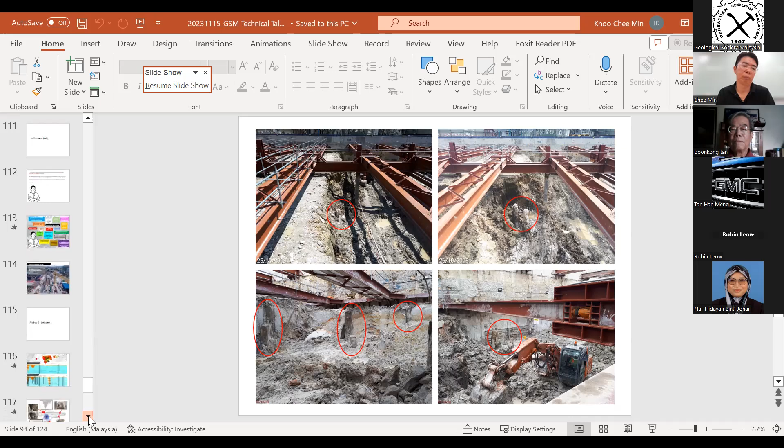And to answer Mr. Muklis and Mariam's question just now - yes, of course we need to do the historical work on the ground, looking for whether the area was a mining area or not, whether it's mine tailing or not mine tailing. So we do have to do a historical background check. And regarding geophysical survey, we do that as a preliminary investigation, but in this case we had no need because we already had bore logs and already did the SPT test. There's really no need for a geophysical survey.

Engineer Khoo, there's one more question in the chat. I know you're pretty interested about geophysical survey - although we didn't do any geophysical survey at the SKL site, at the second site I want to show you, we actually did microgravity methods, which are quite useful also in shallow limestone, and there were also surprises encountered. So for the other site, we did not only microgravity, we're also using normal MASW, resistivity, all that, to supplement the borehole investigations.